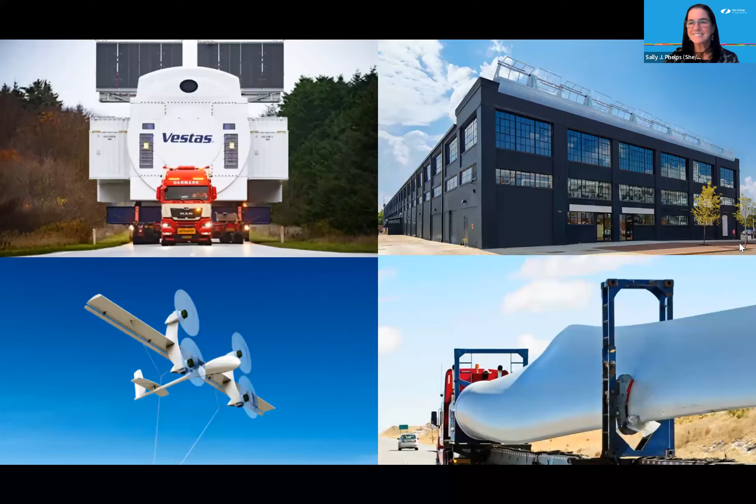Thanks, Sally. I guess I can kick us off because I think when most people think wind, they might think of the traditional three-bladed horizontal axis wind turbine. And so that's where I've spent all of my career. But I'm really excited that we're also joined by Ellie and Erika, who have a different perspective on wind and one that might be perhaps more relatable to everyone on the call.

So yeah, I guess a little bit about myself beyond what Sally said. Gulf Wind Technology is where I'm working now, and we are working on developing a rotor that's suitable for hurricane-prone regions. So the Gulf of Mexico is our primary use case, but it could be broadly applicable around the world to Southeast Asia, India, and other locations. And it's the first time I've worked at a company that's a small company, not a multinational, at least not yet. It's been a fun experience to learn about the small company life and being able to wear different hats and try my hand at different areas of the wind industry.

And so I guess as we go through this presentation, we are hoping to save about 15 plus minutes at the end for questions. When you have questions, I can hopefully address anything you have about the traditional kind of utility scale wind that you might see as you go on a road trip across the country.

Erica? Cool, yeah, I could jump in. So hey guys, I'm Erika Boeing, class of 2010. Done a number of different things since Olin, but the last 6 years or so, I've been working on a startup that I founded called Accelerate Wind, and we're developing affordable wind energy technology for commercial buildings, and you can see a picture of our turbines up on the upper right-hand side. Later on, I'll tell you all about them, so I'll save that for later. But as we go into Q&A as well, I know a whole lot about the small wind industry, specifically in distributed wind, more on-site generation, and also just hardware startup life in general. So happy to talk about any of those.

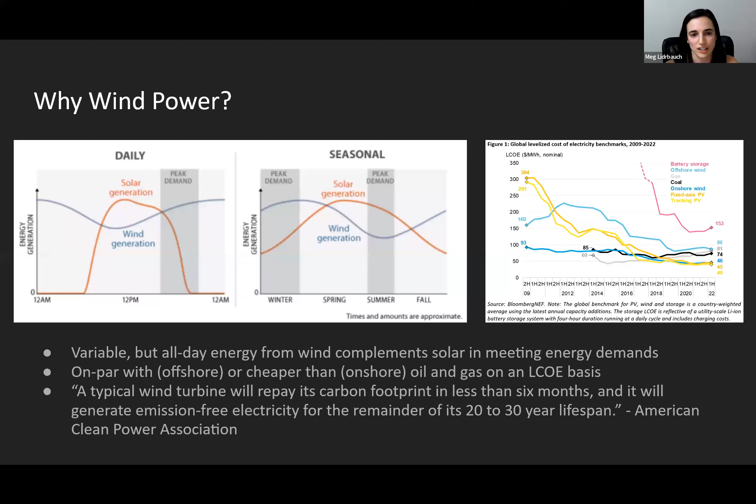I'm here to talk about my first order take on working on this kind of technology, where you've got the choice between working at a big multinational like Meg has done, where you're making something clearly very useful - it's already utility scale, but you're maybe a smaller cog in a larger machine. There can be an intimidation to working on an established technology like that.

Whereas things that are more startup phase tend to be very fun. You can often play a big role in developing the technology, but its usefulness has not yet always been proven. But today I think we're going to complicate that a little bit. Meg can speak to how much fun it's been for her working on horizontal axis wind turbines, and Erika and I can speak to the things about rooftop wind and airborne wind that are doing very useful work for renewable energy. And then also, if you're not having fun, you might just have a deadline coming up, and after that passes, you'll feel better.

So many engineering jobs are fun, as long as you don't have an extremely stressful deadline.

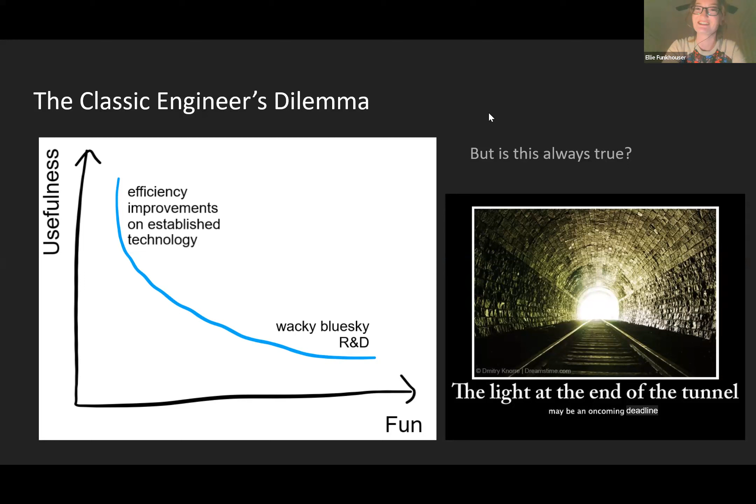However, Erika at Accelerate Wind... oh yeah, Ken, turn off your speakers. Thank you. Your mic.

Erika has found a way to harvest wind in cities and urban settings, and she'll talk about that. Also, Ken, did you have a question?

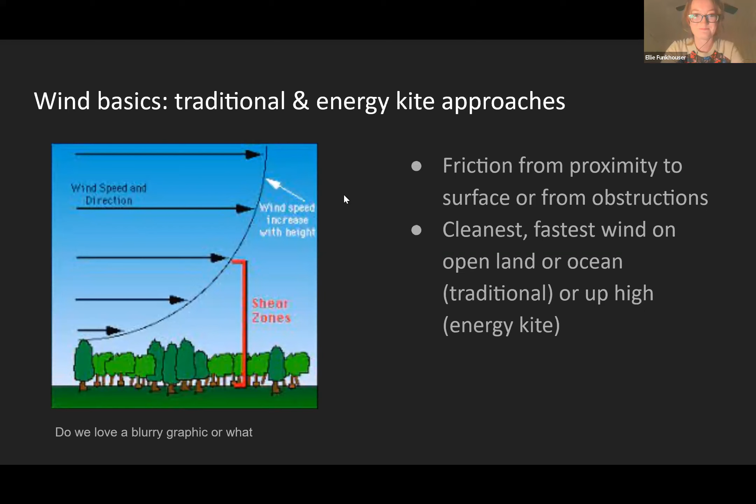No, it's just that Zoom always starts with your mic on instead of turned off like on Teams. It is problematic.

So I guess one of the key principles of at least traditional utility scale 3-bladed horizontal axis wind is the Betz law, which basically says that the maximum energy you can extract from the wind is 59.3%. So you'll never be able to get 100% efficiency, and you'll never even get that 59.3% efficiency from wind energy. It won't ever be that value because there's always going to be friction and other things that pull you away from that idealized 59.3%.

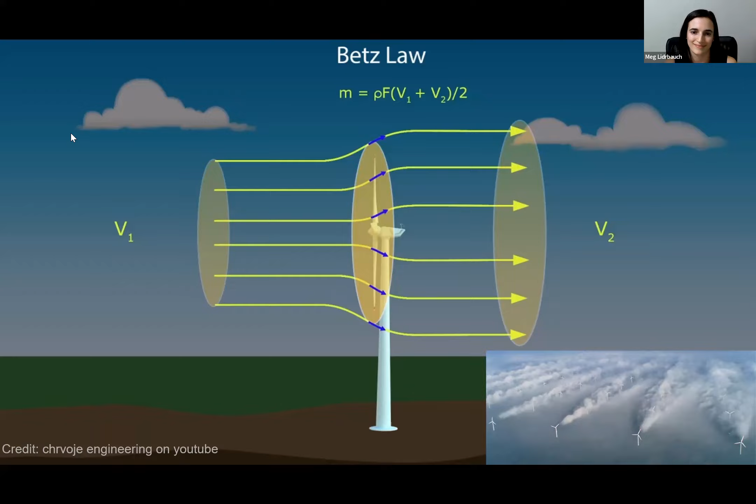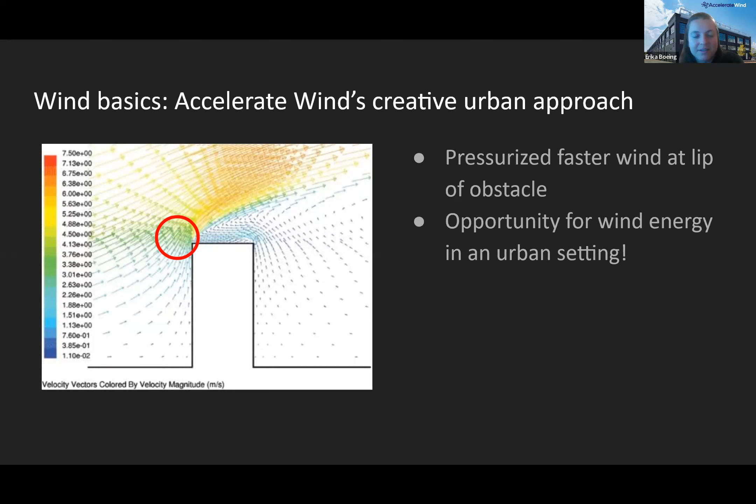And so it all started with an idea that I had while I was in the Netherlands, thinking, hey, can we take advantage of this faster wind to produce meaningful power, because it looked like there was really a lot of promising wind there. We've been pursuing that for the last 6 years. If you go to the next slide, I can tell you a little bit more how we've done it.

So as you saw before, wind speeds up at the edge of the roof, but what we learned pretty quickly as we got into it was that you tend to still get a ton of flow separation at the edge of the roof. It hits the roof, separates pretty quickly, and you would still really need a tall tower to capture it, which would be ugly and expensive and just really not make a lot of sense.

And so that's what we spent most of our time doing. Our core IP is all in how do we draw that faster wind down to the edge of the roof, and we've patented the range of shapes that will let us do that. Actually, we've worked with a lot of Oliners over time as we've been developing this. We've run thousands of computational fluid dynamics models, and a lot of Oliners have helped contribute to that, among many other things over time. I know there's a few in the Zoom right now who are working with us.

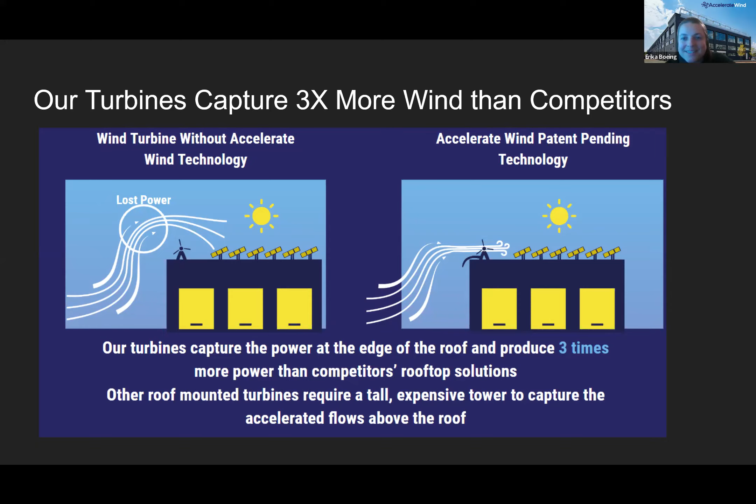And it looks pretty cool if you go to the next slide. I guess you can see it behind me as well. Oh right, I forgot I had this on here. This is pretty cool - the effect of drawing the wind down to the edge of the roof.

That's something we were finally able to see live just this past year. We have a wind turbine test site about an hour south of Salt Lake City, Utah, and we've built up a mock building there. It's in this canyon where the wind almost always comes from the same direction, so you get really predictable high-speed wind.

We were able to run a test where we hung snow machines at night off of a forklift, used a spotlight to illuminate the view over the building, and then used image processing and a GoPro to track each particle as it went over the edge so that we could compare it to our models and really show that we were drawing as much wind down to the edge of the roof as we thought we would be.

And it worked really well. It actually, in real life, performed better than our models, which is crazy. You can see a little video of that happening right here, where you can watch the particles just kind of glide over the building, if it loads.

There we go. Yeah, so it's almost textbook the way you can see it just kind of hovering over the top. I got very excited because I've been working on this for like 5 years and never thought I would actually see the effect live. So it was really cool to see this actually happen.

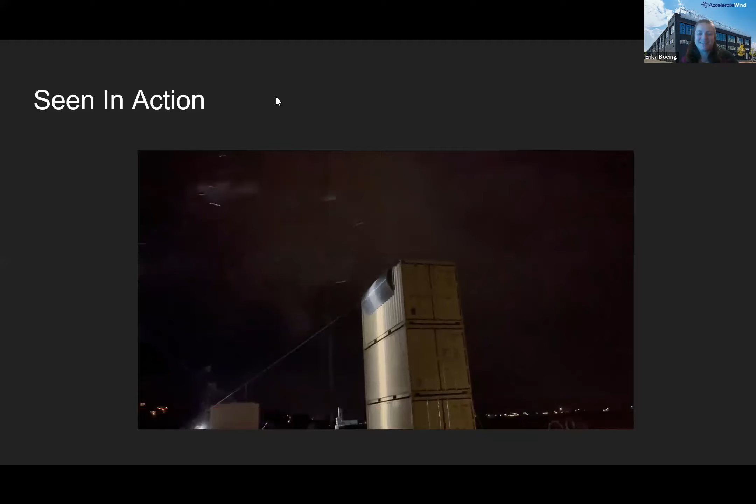But designed just like solar, so they can be installed in modules, and you can install any number of turbines depending on how long the building is and how much power you want to produce, also designed to go alongside solar. A really important cost reduction piece of our design is making sure solar installers can install them using people they would already have on site at a solar installation. That's actually probably just as big as our edge-of-the-roof technology in terms of getting the costs down of the system. So we spent a lot of time working with them.

Awesome. Yeah, so I think if we can transition, we'll go back to kind of the traditional view of wind a little bit.

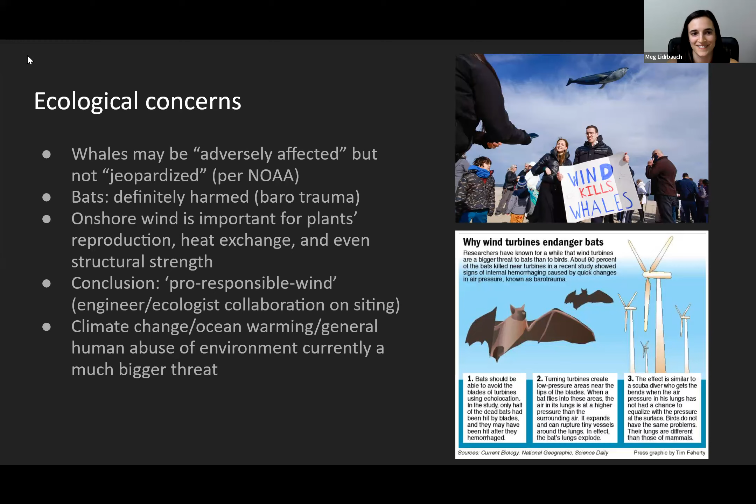But yes, energy kites, the stated use case is that they are quite lightweight and portable. So the idea is that you may have situations where you would like access to a green source of energy, but maybe not for long enough, or not with enough time to wait to put up a full wind turbine. Whereas an energy kite you can deploy in under a day, and it zooms up there and starts sending kilowatts down the tether.

So while I don't think there are energy kite companies that have fully proven out utility scale power generation yet, many of us have proven out lower scale power generation, and basically the autopilot development is the big hurdle. So working on it at a smaller scale lays the groundwork for eventually creating larger versions of this technology.

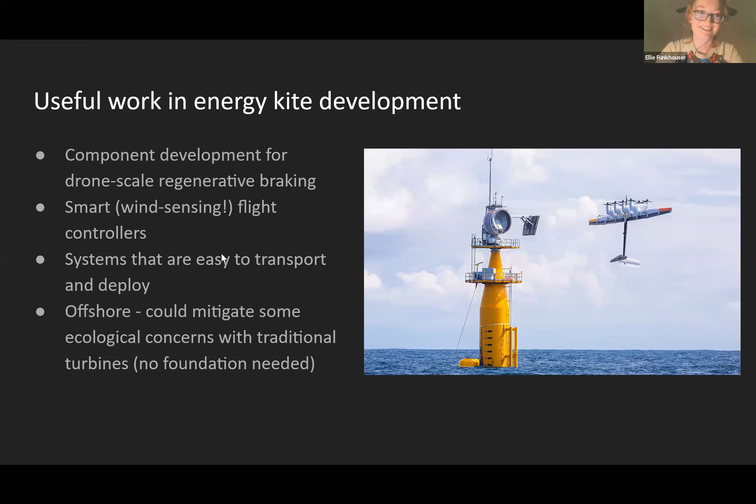Yeah, so diving in a little bit more to rooftop wind, I took the fun and usefulness graph literally, and wanted to talk about the fun and the usefulness of rooftop wind. As Ellie was just saying, rooftop wind energy generation too is just a huge optimization problem. I think all wind energy generation is a huge optimization problem.

One of the things I really like about working in this industry is that you can really hold the whole product in your head. It's a super multidisciplinary product, and it's important to understand the customers, the permitting, but also the mechanical and electrical engineering and the aerodynamics, and really the interplay for all of those. I know a lot of Oliners are really good systems thinkers, and so that's something that's really fun about being in this industry.

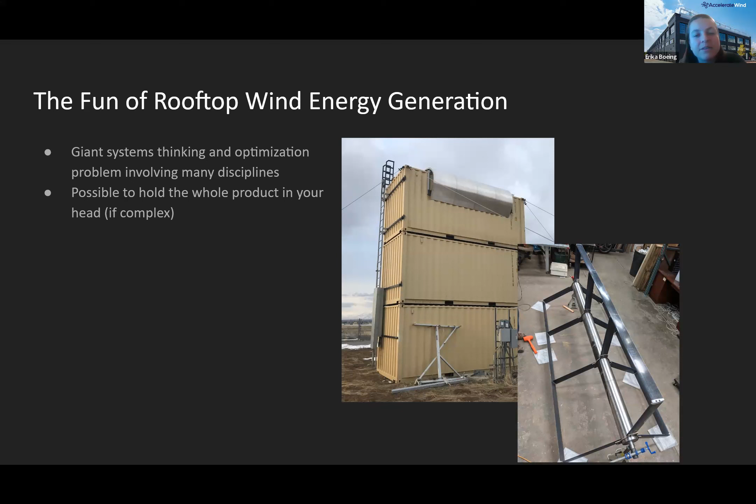And I think there's a lot of low-hanging fruit as well in terms of systems optimization, just because rooftop and small scale distributed wind has traditionally been run by a lot of smaller companies that just haven't had the time or energy to do this kind of optimization. So there's a lot that could be done to improve these technologies, and that's a big piece of what we've focused on. And then to talk about usefulness of rooftop wind,

there's pros and cons, but a lot of pros these days. One of the biggest things that has changed since we started the company 6 years ago is in the last 1 to 2 years, I've seen a huge shift in commercial buildings looking for technologies for on-site generation.

I think this is driven by a whole bunch of things. It's partially the IRA, and it's partially the fact that a lot of big corporations are feeling pressure from even employees to sign up for decarbonization commitments. And a lot of CEOs of these companies have signed up for commitments that they just have no idea how to meet. And there's a big push for on-site generation as a more pure kind of impact, rather than just paying for retiring some renewable energy credits elsewhere.

You could actually count it when it's on site. And so people who would kind of talk to us 4 or 5 years ago when I started, but be pretty conservative, are now very excited and looking for solutions for on-site generation. So it feels like it's really at a good time, that it's filling a good need.

And then, this is probably true for most of wind, but because it's local, there's resilience and intermittency challenges that it can solve. In terms of resilience, we're talking a lot to the Air Force right now, because they have huge resilience goals and huge decarbonization goals, but they can't use tall wind turbines because they'll often interfere with flight paths. So they're really excited about us having something that's closer to the ground that can help them develop a resilient solution.

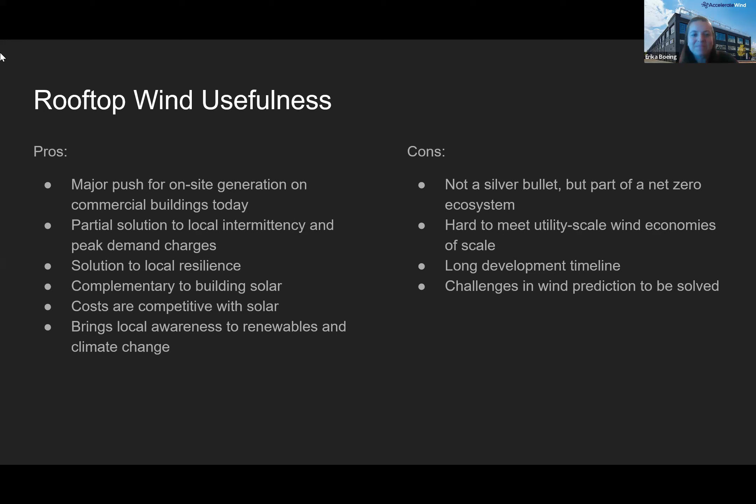I wanted to provide a cautionary note to our young engineers, myself included. I think we all seek out work in sustainability because it feels good to use your skill set to do something positive for the world. If you have a mild slow burn climate panic at all times, your job could possibly help with that. But a lot of the climate problems are not engineering problems, they're political and social ones. Energy use reduction is going to be a much bigger piece of the pie than a lot of companies will lead you to believe. It's not just creation of new technologies, but reduction of energy use. So your job probably can't provide all that for you.

Companies can greenwash, and they will when they make job postings. They know you're a good-hearted person who wants to do work that matters. So every job posting you'll apply to will claim this technology is somehow good for the environment. Take that with a grain of salt. Do a first principles evaluation: does it actually seem like a good idea that will help decarbonize the earth in a meaningful way, or is it just a small chunk of the pie that they're getting a lot of funding for? The profit motive is a thing. No matter what a company's stated goals are, their real goals are probably much more related to their source of funding and profit.

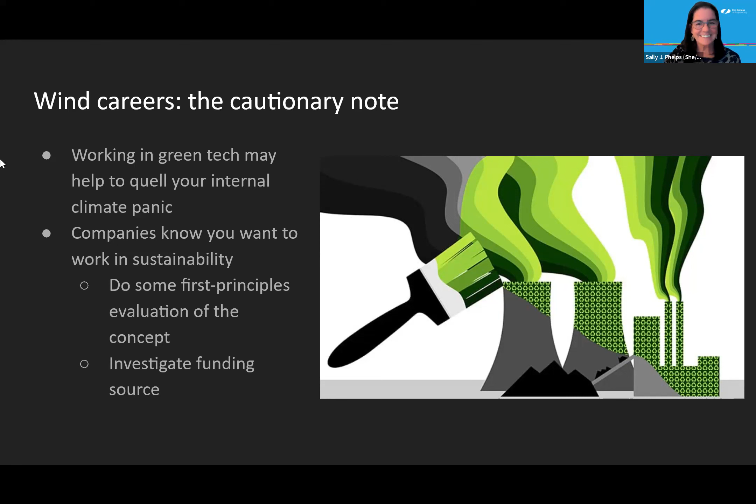All right, back to Meg for some optimism. In my defense, I'm a test engineer. My job is literally to be pessimistic.

No, and it's a good thing to remember, and definitely true. Every company has its demons in the closet, right? Nothing's inherently good, at least I haven't found it yet.

So to wrap up, I think all three of us can agree that wind, whatever form of wind energy, is a fun engineering challenge. There's a lot of trades to balance, optimizations to solve for, new problems to tackle. There's an endless engineering challenge that can provide careers worth of learning, enjoyment, challenge, and fun.

What we want to point out, using the traditional wind view on the right, is that it applies to all three technologies we discussed today: the wind industry takes more than one type of major. For traditional utility scale wind, we need geologists, seismologists, hydrologists, depending on whether it's onshore or offshore turbines, to assess how the foundation will sit in the ground. Structural engineers design the towers, internal structures, foundations. Mechanical and electrical engineers are all over the hub and drivetrain, the whole system. Aerodynamicists and material science engineers do a lot of work on the airfoils, blade structural design, and blade design.

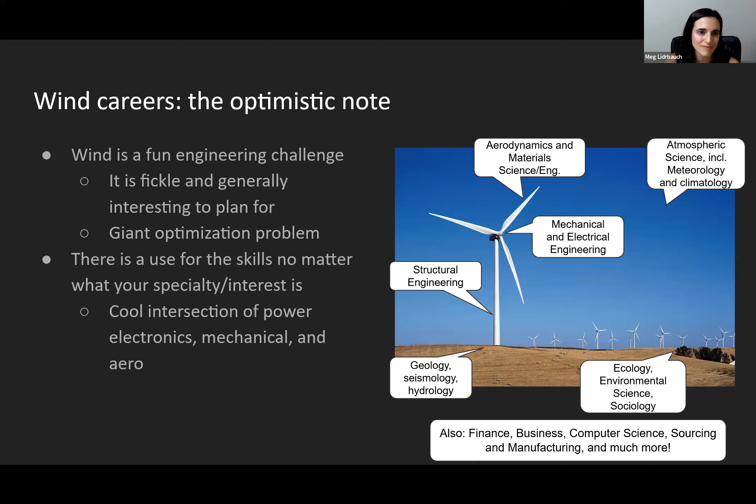So with that, I think we just wanted to kind of have this slide up while we move to our question section of the talk. So there's a couple links or resources on the right.

NREL is a really great one, the National Renewable Energy Laboratory. It covers all of the technologies we've talked about. You might have to do a little bit of smart searching, but they have some really good stuff there. The American Clean Power Association is more focused on utility scale wind and solar and battery storage, but a great resource as well. And then there's this one link on airborne wind energy in particular from NREL. So with that, I think we wanted to open it up to the group.

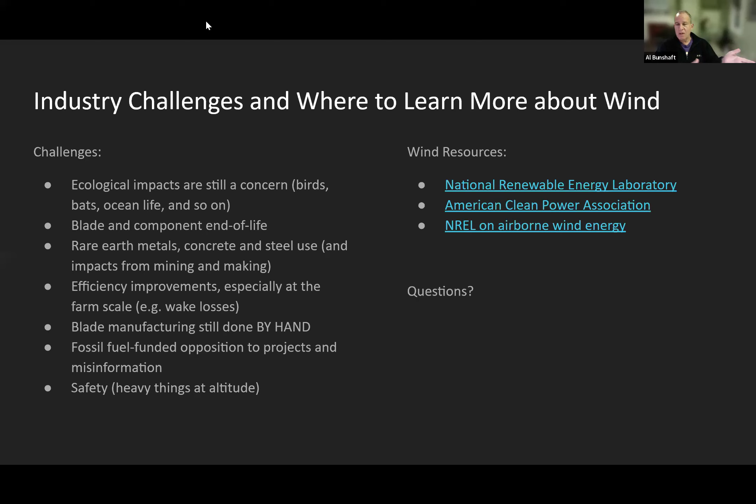My impression is women are drawn more by the cause into certain industries as opposed to purely the technology. And I would hope that climate change broadly, and all the technologies that will help us out of this hole we've dug as a culture, would attract more women. So that's why I asked the question.

Thanks for that. I guess I have the floor, so I'll just say quickly, Erica, very cool product concept you're working on. How far is it from being in the marketplace? Does it have moving parts? Are there blades sitting up on the corner of the building there? You said that was a rendering. You're accelerating wind over a place where people are potentially working—what about noise? Could you comment on those things?

Yeah, so how close are we to commercialization? We right now are doing our final shakedown test at that test site in Utah that I mentioned. That's where we thoroughly test and measure all the loads, make sure it's way over-designed factor of safety wise, and then get ready for paid pilots.

So we're expecting a paid pilot within the next year, doing that for a couple of years so that we can work out all the little bugs, and then certify and scale up the turbine.

In terms of noise, our last prototype that we built was only about 40 decibels, so kind of quiet library conversation. Our turbine that we're designing now is different, so we'll be testing that in the shakedown test and doing really thorough acoustic measurements. But from an engineering standpoint, it should be possible to get to a similar level once we go through all the refinement, because it's a pretty stable configuration. So we're not too worried about noise, it's more of a detailed design challenge.